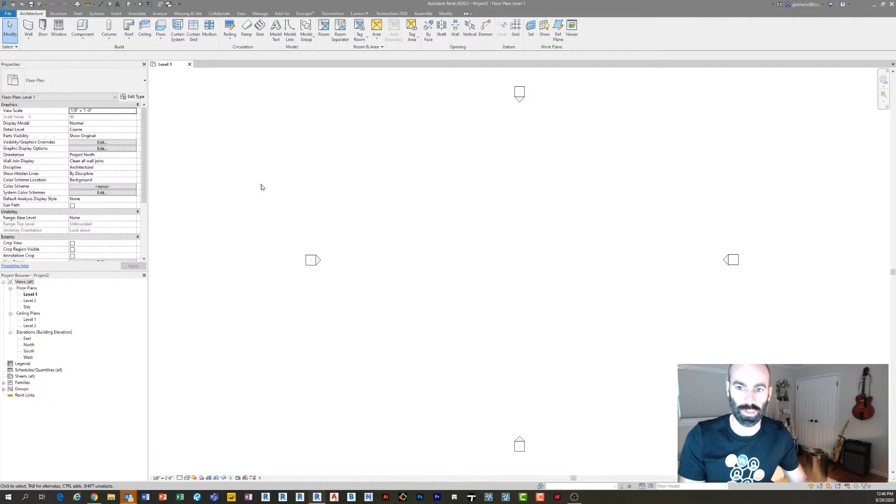My typical technique for modeling things like rain screens and anything that really has gaps in it, your best bet is to utilize curtain walls for that. And it seems goofy because if you're new to Revit, you hear the word curtain wall, you're thinking glass, tall buildings, etc. But really the curtain wall tool is just called the curtain wall tool, but it can be used for dozens and dozens of other things.

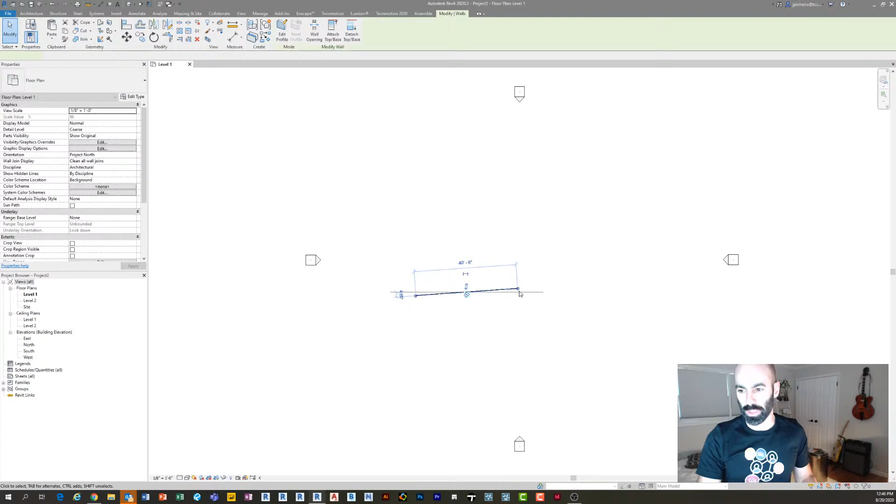So what I'm going to do in here is I just created a quick new project, and I'm going to use curtain wall 1 as my example. I'm just going to draw this curtain wall. The nice thing about curtain wall is that it can be used to make curtain walls like you're all thinking, right? But the value behind it is that it's a wall family that you can host grids and other walls inside.

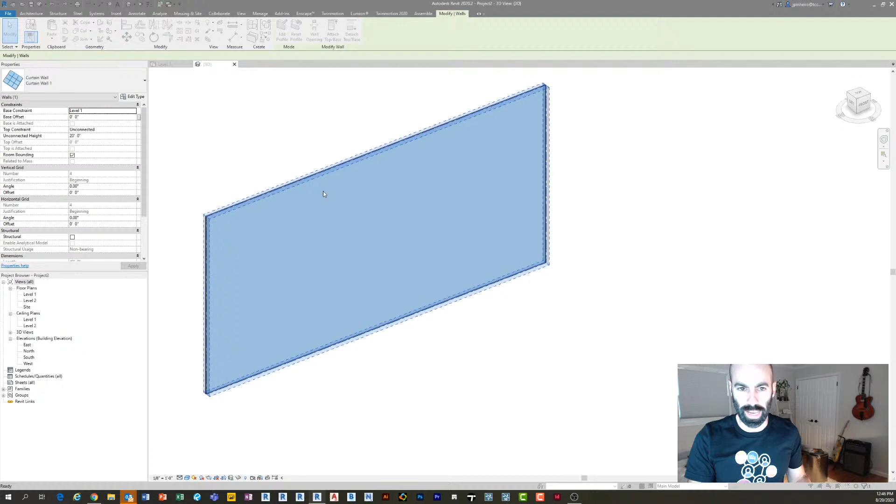And so a perfect example is, this is a wall, right? Instead of using glass, if I go to my edit types, I can actually make my curtain panel a wall type. This is not necessarily answering your question, but I do like to show some of the things that you can do with curtain walls. You could see my curtain wall is now an 8-inch CMU wall, right?

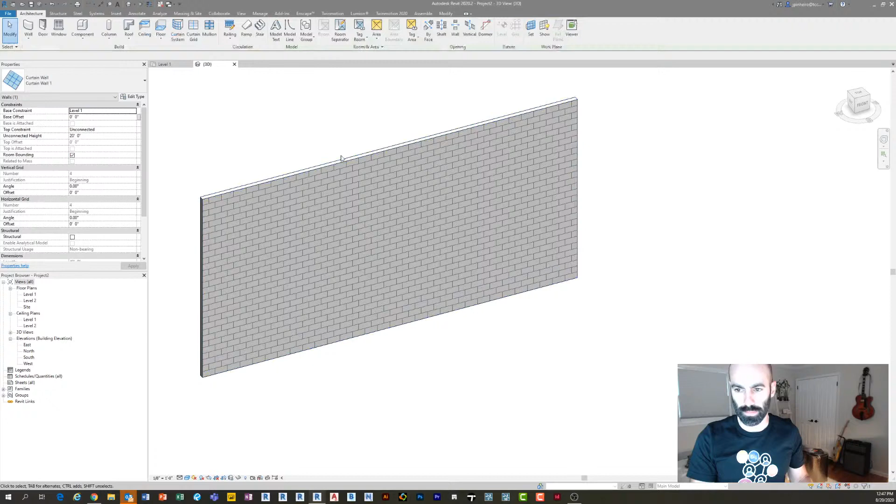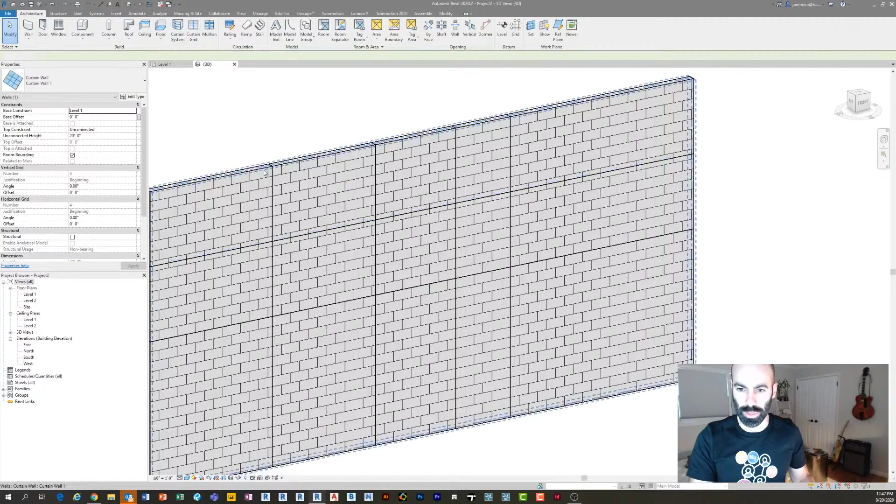But the benefit here is that I can add grids, and I can manipulate those grids. I can change the wall types within the grids. And I can also add mullions and manipulate mullions. So I can use the inside or the outside of the grid to do things. Now, CMU wall is probably not the best example. There's not much you're going to do here, other than if you really wanted to, you could put some mullions in there, so if you wanted to make a reveal or something like that, you can.

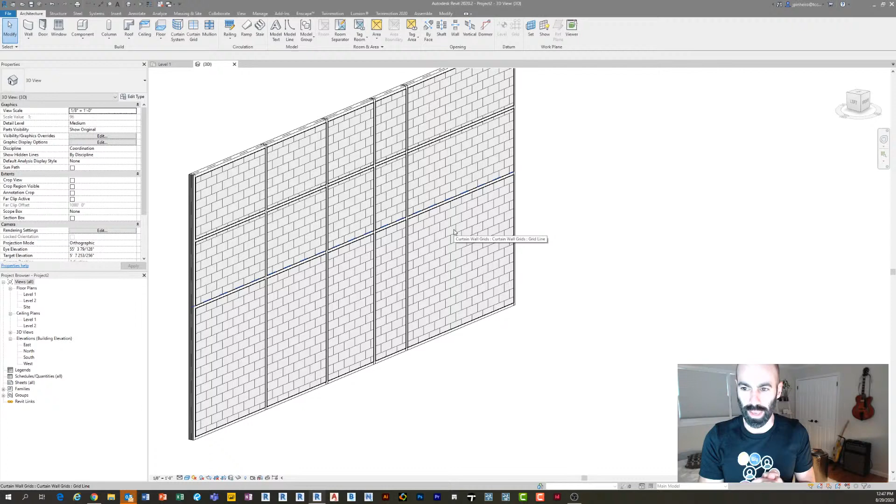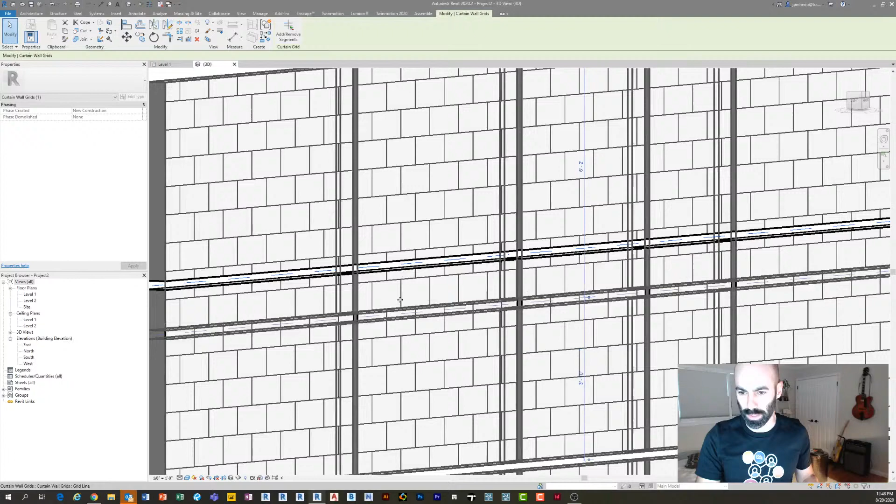And so, one thing you can do is you can filter out these curtain panels, or these curtain mullions, and use them. Or right now, for the sake of time, I'm just going to select them all and hide them just for fun. And so now you can see I made a CMU wall that has spaces in between it, but it's parametric, right? So I can go like this, I can go like that, I can move it around. Or I can make the spacing what it is.

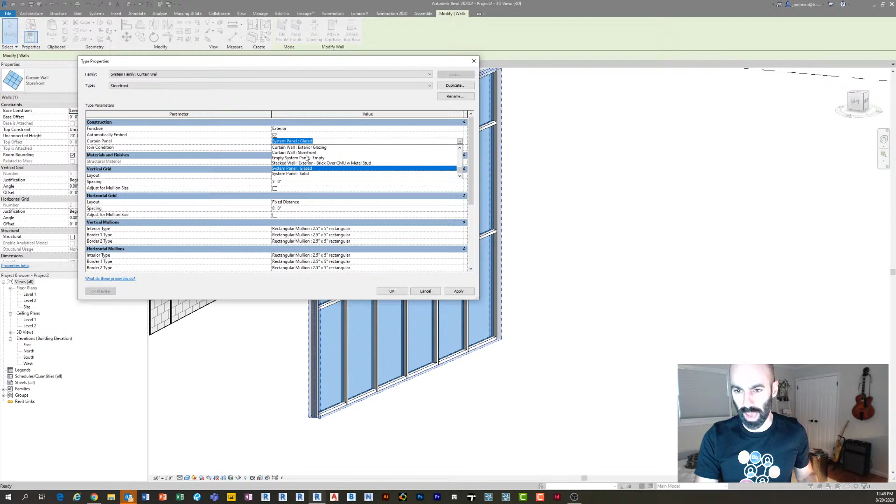But the other thing you can do with curtain walls is, if I was to draw this curtain wall, you also can use an empty system panel. So you don't need a wall within the panel part. So then you can use the opposite. You can use it as a gridded system of something, whether it's wood slats or what you're talking about, rain screens. So for example, if I go here and I say I want my system panel to be empty, there's one called empty system panel, and click apply.

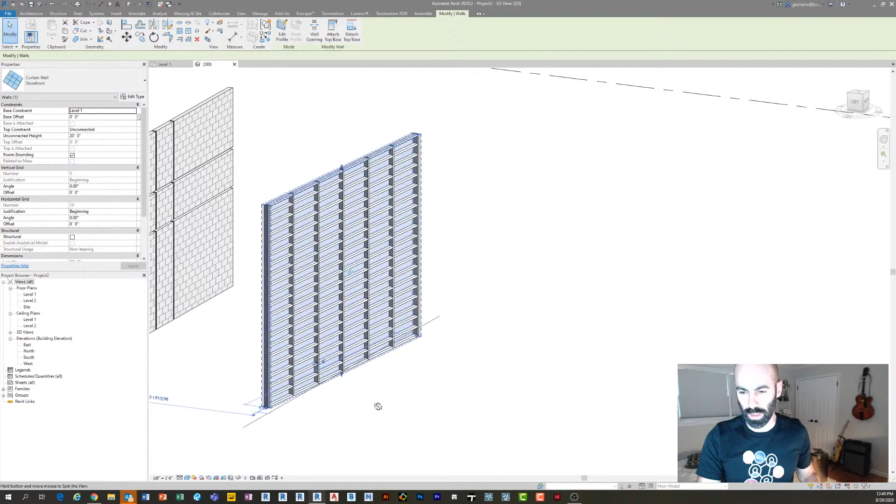Now I just have this open grid, and I can say I only want it to have a horizontal layout. So I'm going to get rid of my verticals, and I'm going to do a fixed distance of 1 foot for the horizontal. Click OK. Oh, I didn't get rid of my verticals. Try that again. Fixed distance, horizontal. Oh, that's all right.

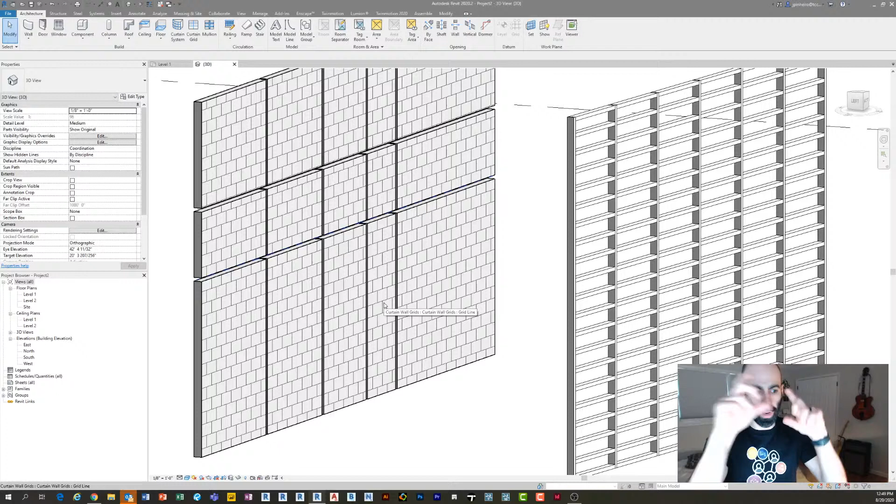So now what you can see is I'm starting to make, like this could be a rain screen, or this one could be the rain screen, right? So to me, that's how I would approach any of those gridded models that have to have some sort of reveals in between, pulled away, and there's different ways you can utilize the space in between. But yeah, and there are a ton of tutorials.

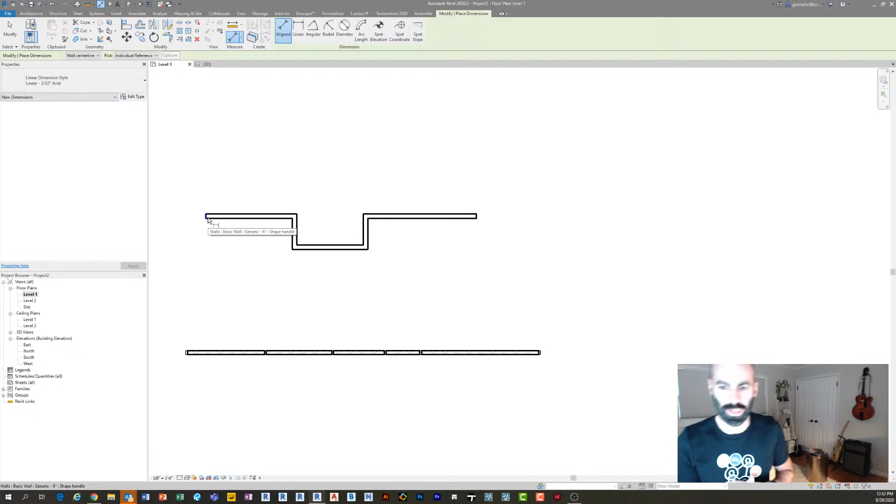So if I have a bunch of little things here, one of the really cool things about Revit, and those of you that are CAD users can probably relate to view scales and annotation scales. Revit is fully annotative, so it doesn't matter what scale your view is, everything's going to adjust to it, which is phenomenal. But it's also unit agnostic, basically. So if I press DI on my keyboard and just do a string of dimensions here, there's my string of dimensions.

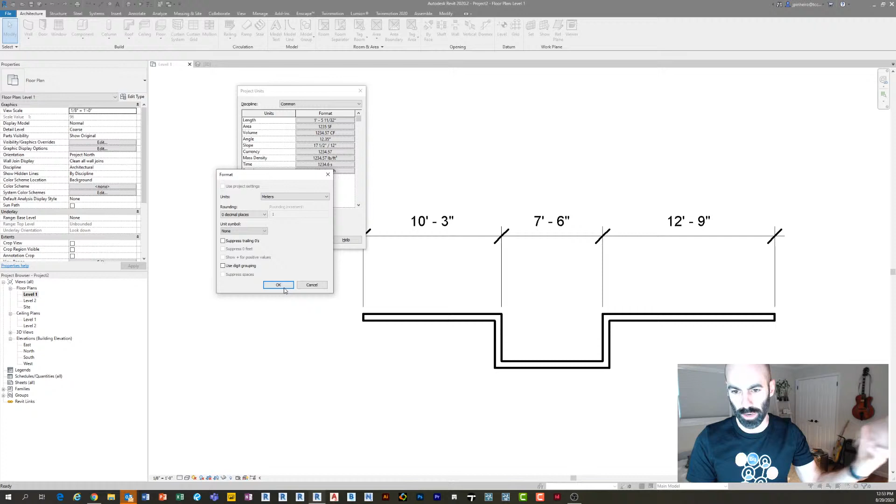There's a couple things I can do, right? This is obviously imperial. If I press UN on my keyboard and go to my project units, I can flip the entire global project units to meters, for example. Cool, fine. But let's say I want to show both in my dimension. I want to show feet, but I also want to show meters. Well, I can actually add those to my dimension types. You can work in both, which is really cool.

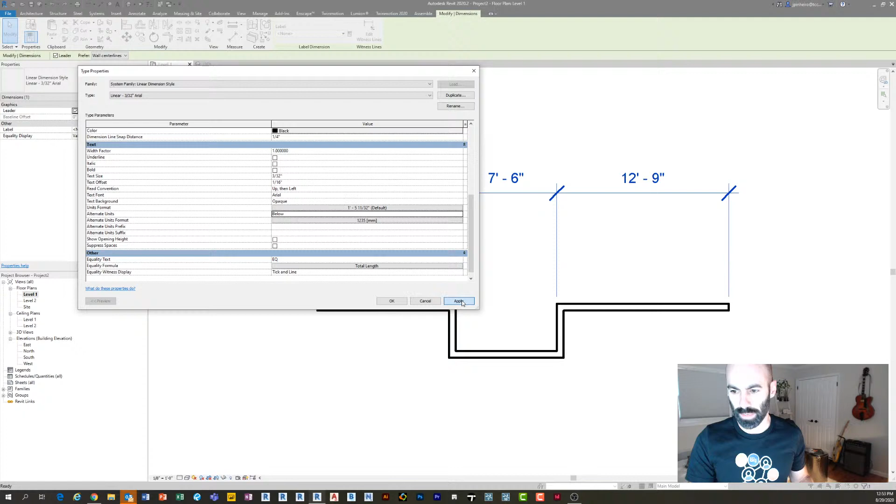So if I go to Edit Types, and I scroll down, you can see there's a little thing called alternate units, right? And I can say, yeah, I want to do alternate units, and I want to do it below, and it's in millimeters. I click OK, and look at that. Now I have millimeters here.

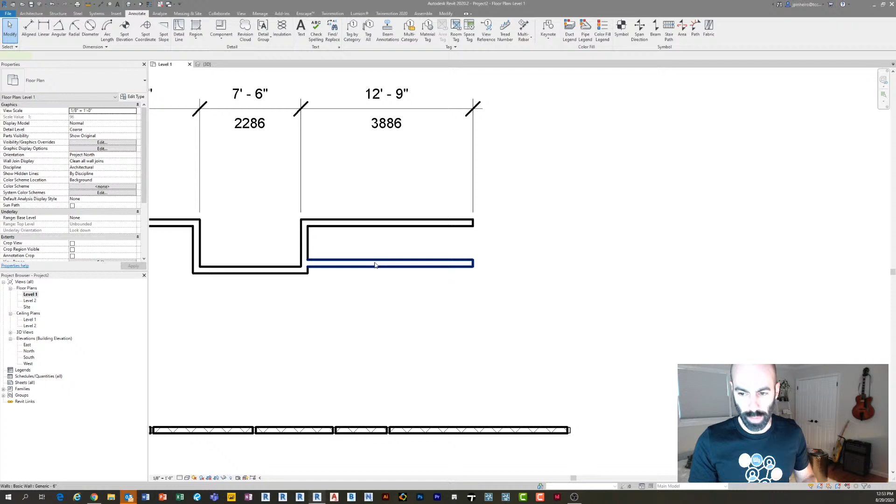The other thing that's really cool is if you're working in a project that is either or. So if I'm working in this project and I want to copy this wall 3 feet, I copy it, and I can type in 3 feet and press Enter, right? But if I'm working on the same project and I don't know what a foot is, because it's some stupid 16th imperial thing that Americans use, and I want to use millimeters, I can actually type 10 or 100 mm.

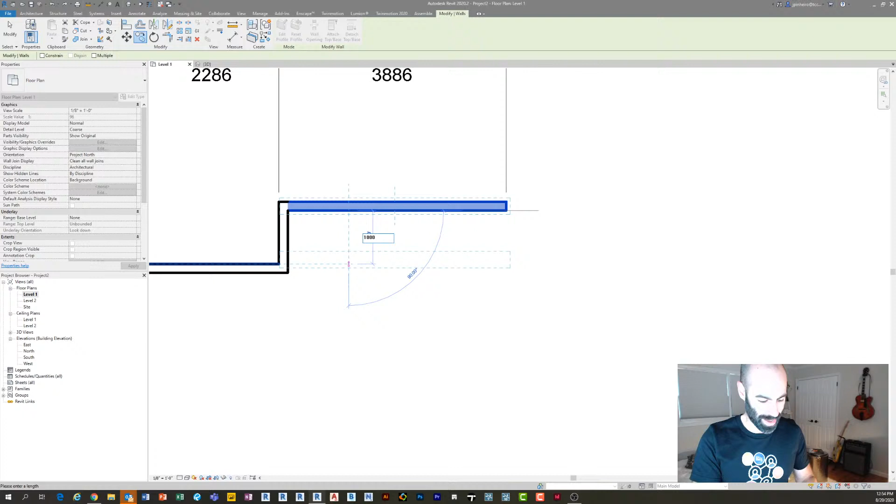And you can see it overlapped. I should probably do 1,000 because I'm a stupid American who doesn't know metric. 1,000 mm, and press Enter. You can actually type in dimensions in any unit format you want, which is super cool. So I don't know if that answered your question, Saeed. So if it did, let me know. But that was just something that came into mind.

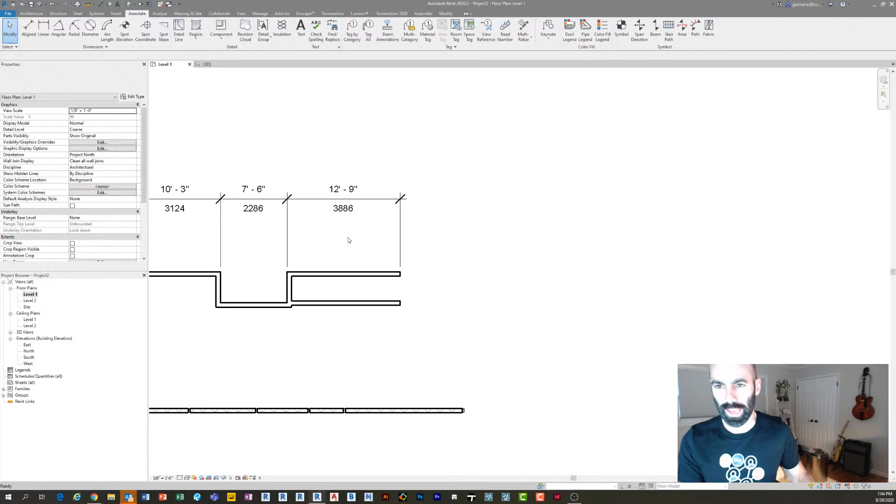Thanks, you guys. How do you sketch a circular stair? How do you sketch a circular stair, huh? Well, I'm assuming you mean a spiral stair that continues, and it's tough. It's not, I shouldn't say it's tough. It's just you're gonna need... And there's a few really good blog posts out there about sketching a circular stair, and you know, the unfortunate piece is what happens with stairs.

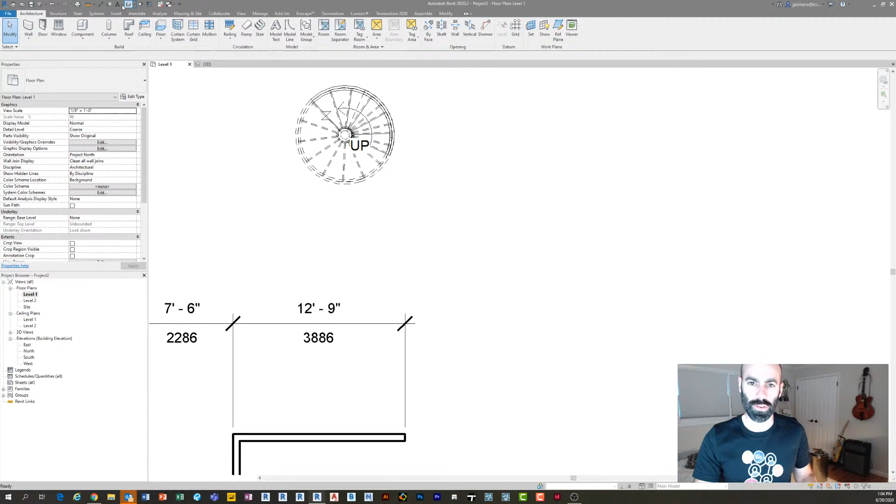If I go over to stairs, right? So you can use the circular tool, but you can only get it to close itself. Right, so I just made a circular tool and it closed itself. So if you need to continue past closing itself, or continue up, as you can see, this thing loops around here. You have to use the circle tool, if that makes sense. So what I did there is I went to stairs, and there's one here for full step spiral.

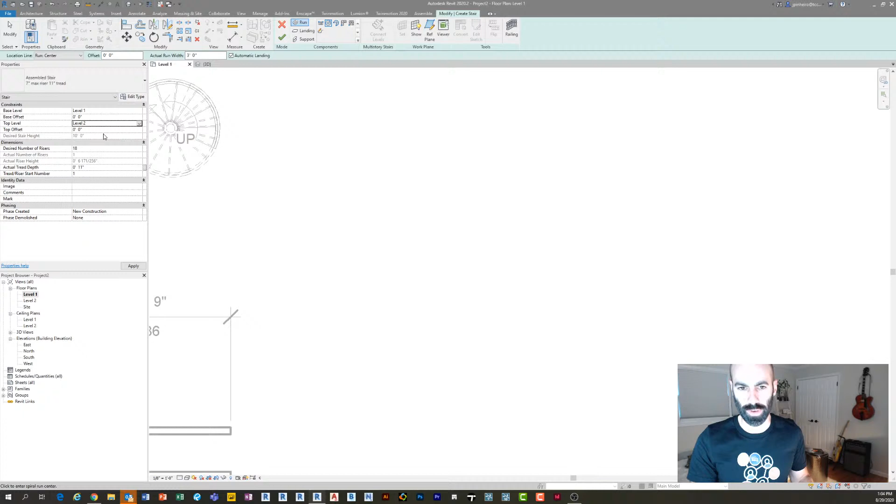And I'm setting level 1, level 2, and it's going to continue the circle based on the level. So if I want to offset to 30 feet above the level, it's going to make the stair based on the radius you want to get to that level. So they've made it a little easier, but well, this one's going to be interesting looking. But you have to use this circle. There we go. You have to use this circle when you're sketching the stair.

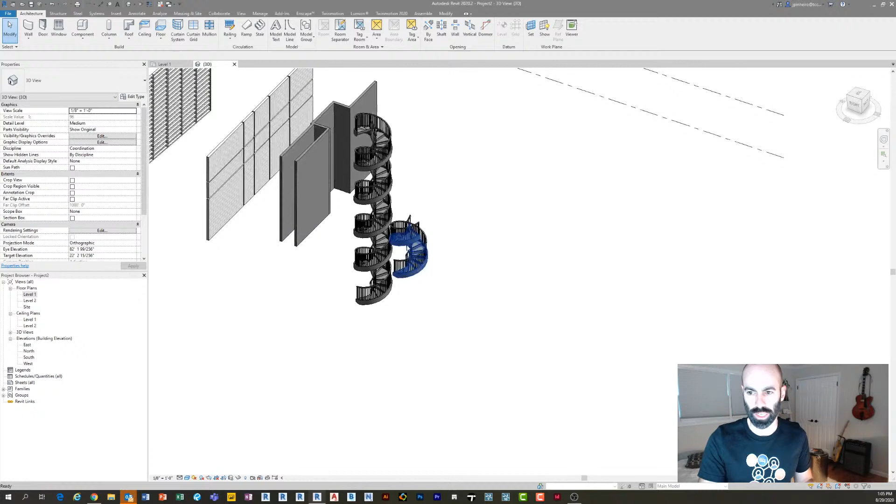Okay, so if I went a little quick, right here in the components, when you're drawing, you could do an arc, you could do a straight, and then you could also do a circle. So there's your spiral stairs. Sweet.

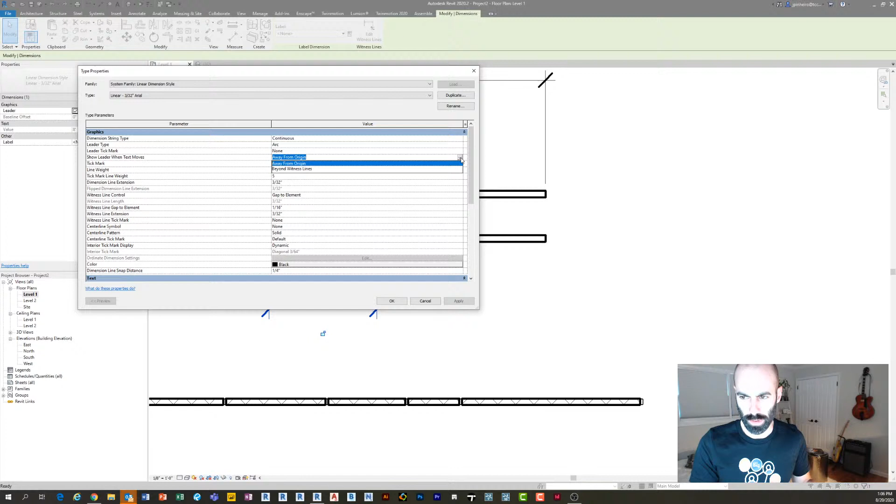Looks like somebody was following up for Saeed about making dimensions show between the dimension lines. So let's go back. Actually, this is going to be fun. Let's see. So I'm going to get rid of the alternate dimensions on this guy. Where'd it go? Alternate off. Okay, now. Dimension style, string.

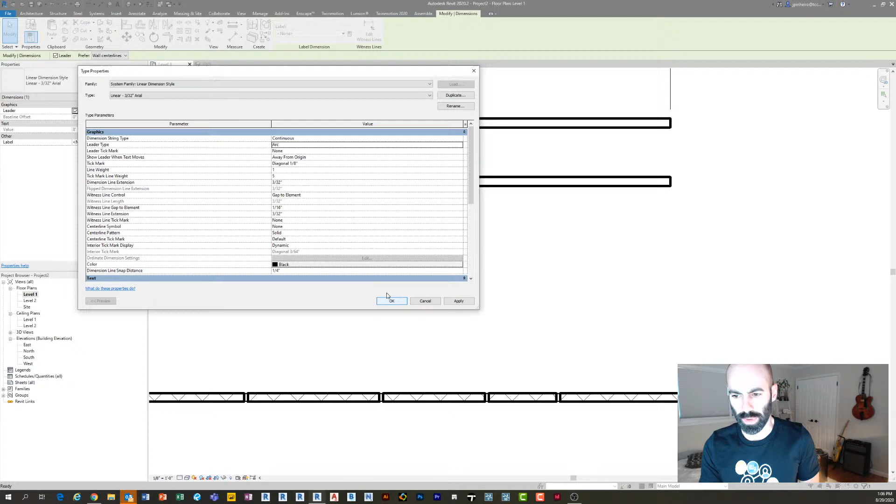So I think what you're asking is, is there a way to show them like that? I think. And I actually don't know. I've never actually tried to do that. I know you can turn the leader off if you wanted to. So for example, in here you can check off the leader, and then you can put it wherever you want. But by default, I don't actually know if you can. If someone else out there does, let me know. I've never tried to do that.

One thing that I will say when we're talking about these things is, one of my biggest pet peeves is people trying to fit old CAD standards into BIM software, right? Because that is such a non-important thing. I mean, really, and no offense to Saeed, this is just a soapbox kind of thing, the fact that your dimension text is above or in the middle of a dimension line is just so insignificant in the grand scheme of what you are doing using BIM software or in general, right?

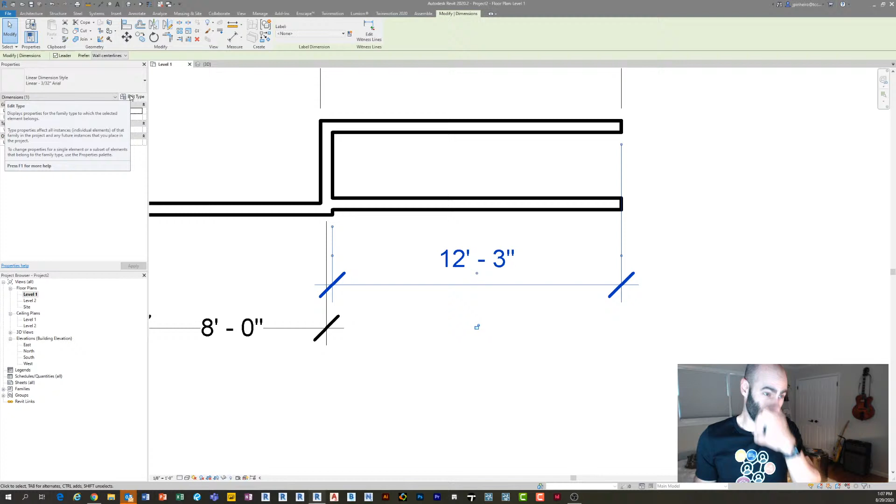So to me, it was like back when you couldn't put filled dots in schedules. I remember at the firm I worked for, the guys were having conniptions because they couldn't put their dots in their door schedule. Where, yeah, you can use a Y or an X or something like that, and those are things that are so insignificant compared to the other benefits you are gaining from using BIM, right?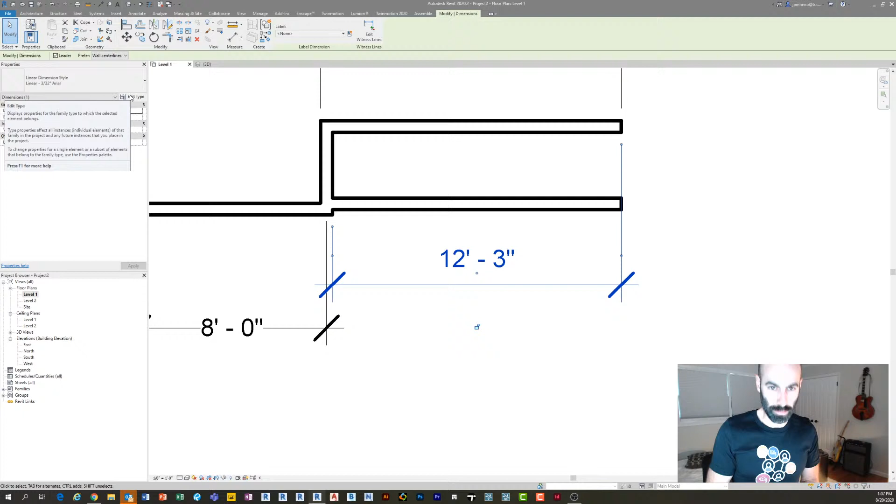Not to say that you can't do it. I'm assuming you might be able to. I just can't remember if there's any way. Text offset, maybe put it to 0. Let's see. No, it's just 0 down there. So if anyone thinks about it, let me know. But yeah.

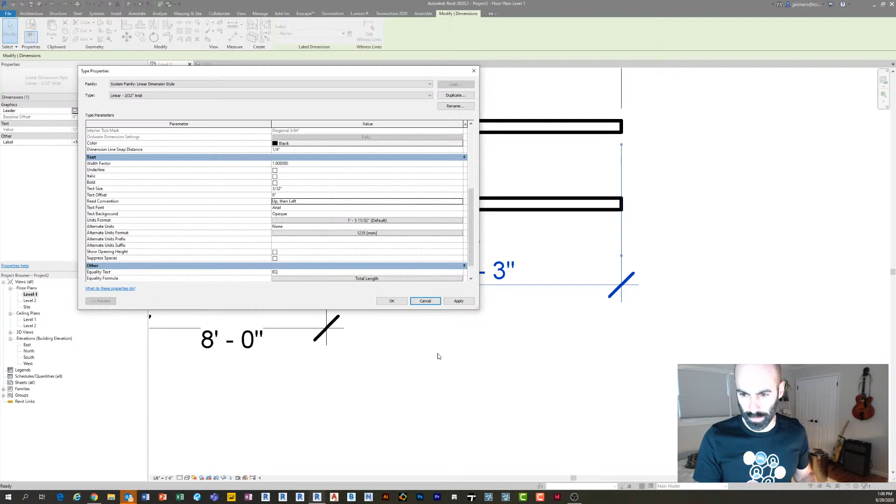So I don't know off the top of my head if you can do that by default. But I will say that I think it's such a non-important thing, right? We should be striving to use the 3D models more than striving to get the 3D models to look like the documents from the 2D program AutoCAD. That's just kind of my thoughts on it.

Didn't mean to go on too much of a rant there, but hey, you guys are watching, so let's do it. Circular stair, I already answered that one.

Ed asked about how do you filter model groups and filter them by some shared instance parameter. We can get into that next week, but since you asked it, I do believe there are different ways to filter model groups. So this is group 1. Model groups themselves have, I'm pretty sure you can make a parameter that lets you do it. If not, I think you can just use group name.

So let me just double check. Woo. All my windows are popping up on the left, so I apologize as I drag everything. I was clearly working on Revit on the other monitor before all this.

The groups aren't in there. So I do believe there is a way. I just have to remember. That may be something that we can pick up with Aaron next week, since we'll be talking on the subject of filters. I just wanted to see if there's any way to do a model groups. Oh, there's model groups. I think I rolled right past it.

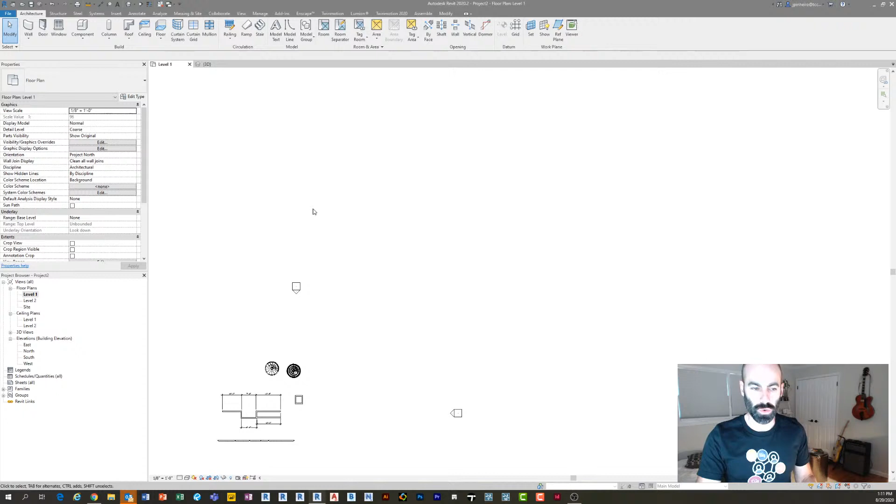So ML Sweeney just asked about parking garages and how cut planes and slopes are kind of messing with you, and honestly, that's a really difficult thing to handle. Your best bet is to work with plan regions. For those of you that aren't familiar, a plan region lets you modify the cut distance of a specific area of a plan.

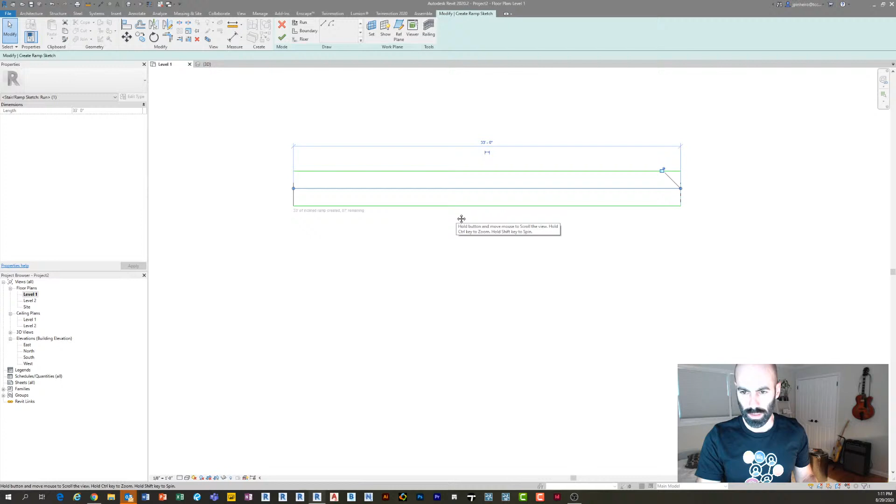So since you asked about parking garages, I'll draw 2 ramps here. I know this is not a parking garage ramp, but it's a ramp. And we'll draw it so that it's really long, 87 feet. It's a long ramp. Okay. Actually, because it's a parking garage, you're probably using sloped floors, so let's do that instead.

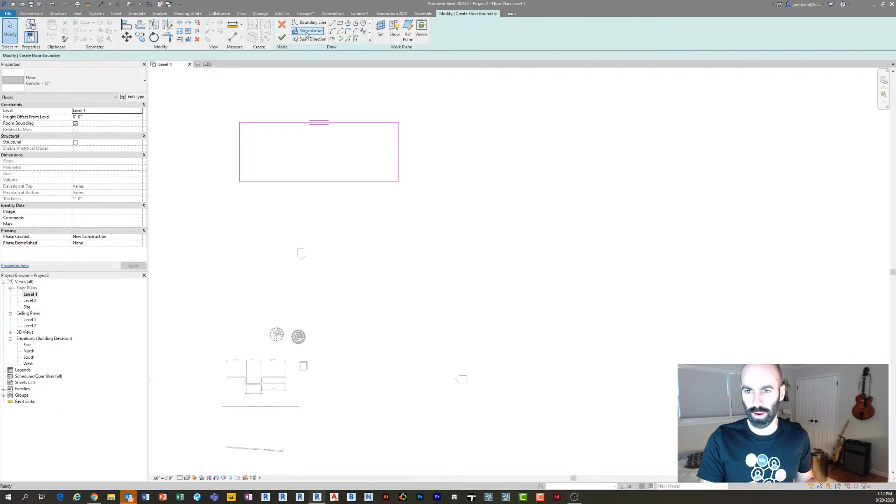So we're going to do a floor here. I'm going to draw a slope arrow, and make this thing slope 10 feet at the foot of it. And then I'm going to mirror this, or I'm going to modify the slope and go the other way. This is going to go up 10 feet, and this is going to be 0.

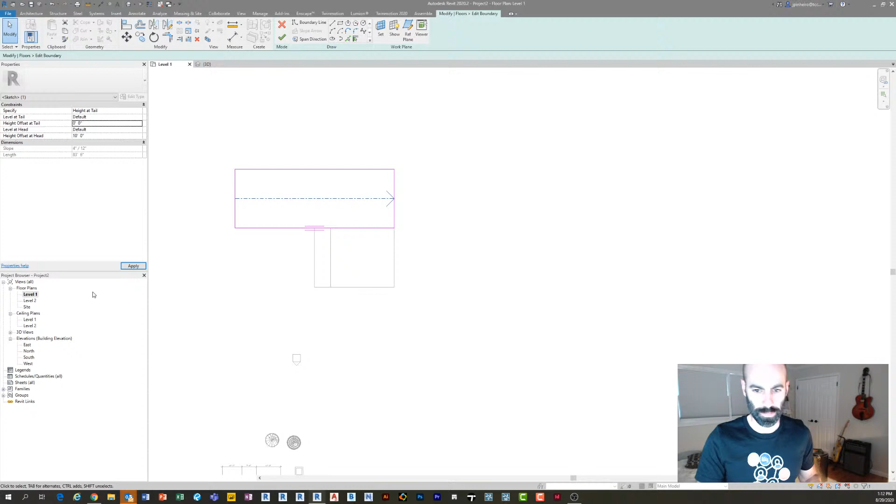Okay, so in 3D, what I just made is these two slope ramps. And so I think the question is, how can you control these to view correctly? It's going to be really difficult depending on how your cut plane is. But what you could do is use what's called the plan region.

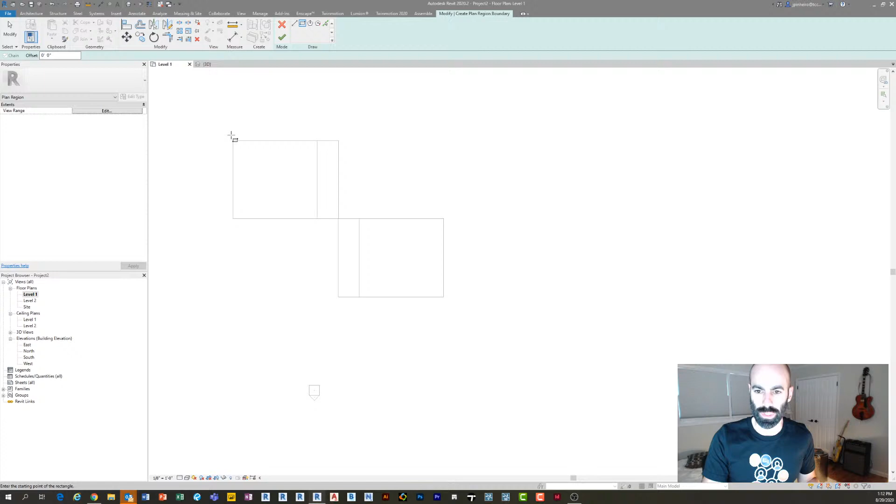So if I go to View, Plan Views, Plan Region, it's a couple clicks in there. The Plan Region is kind of like a scope box where you just draw the border of it, but it allows you to change the view range of just this piece of your plan. If I click this now, the option that I have is called view range. If I click View Range, I can change the cut plane of this view. So I want this to go up to 10 feet, and click Apply.

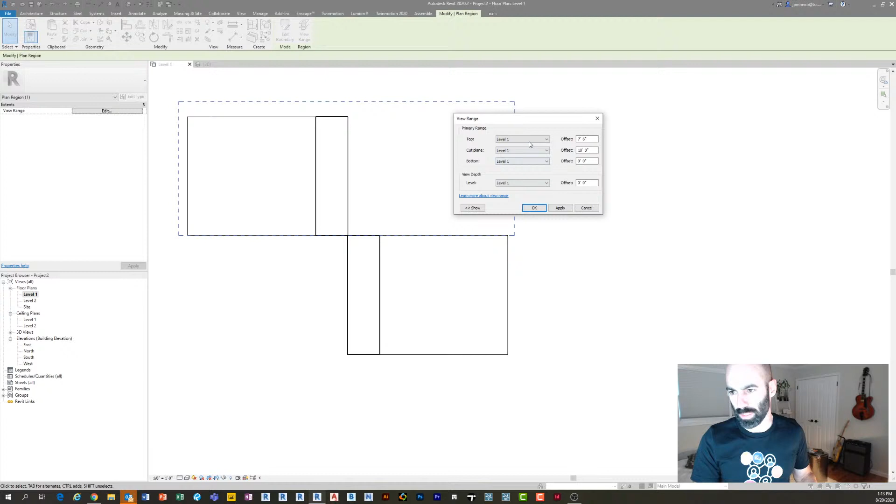That's above the top, of course. You can see now, just within this region, I'm actually cutting at 10 feet instead of 3'6". And so that may be enough to get you to what you need. And the nice thing about plan regions is that you can...

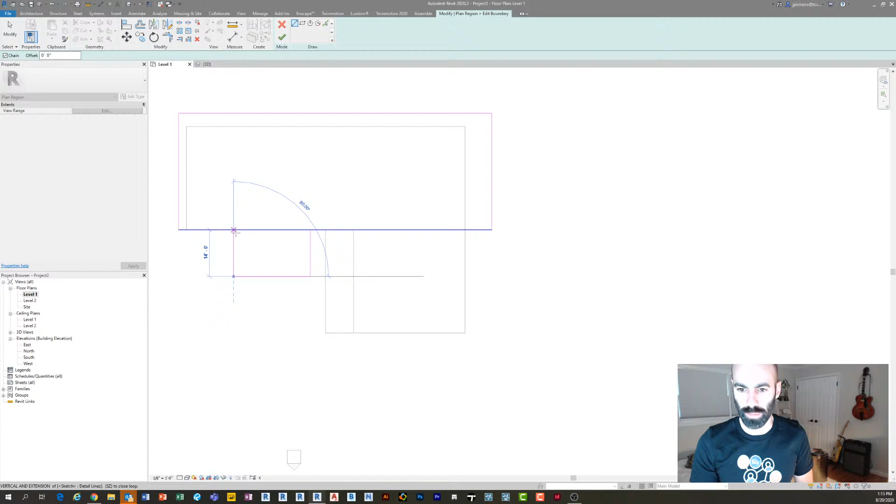I apologize if you guys hear that. Looks like they're finally taking a tree out that fell down last week.

I hear chainsaws. You can actually modify the shape of these. So that may be your best bet for parking garages.

Oh man, we're flying. It's already 1:15. You guys are nuts. This is awesome. All right, what do we got here?

Lowercase in one, uppercase in the other, company standard thing. Well, there you go again. I still don't understand why you would ever want to see that.

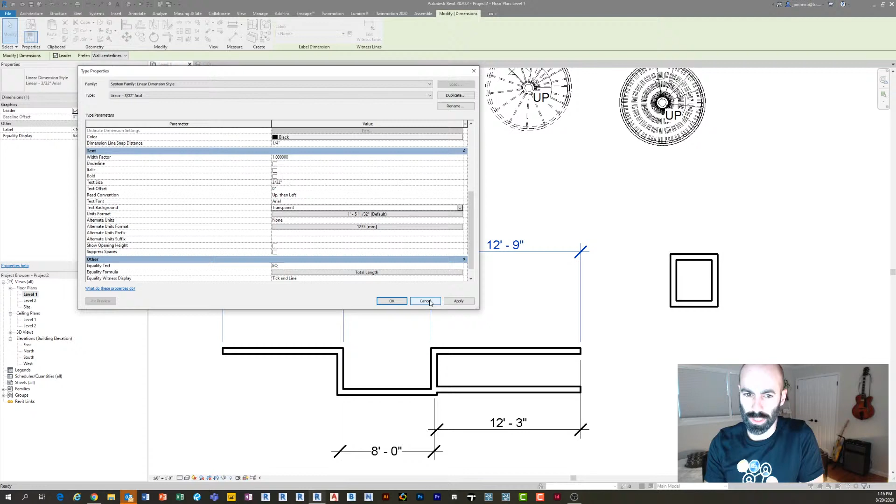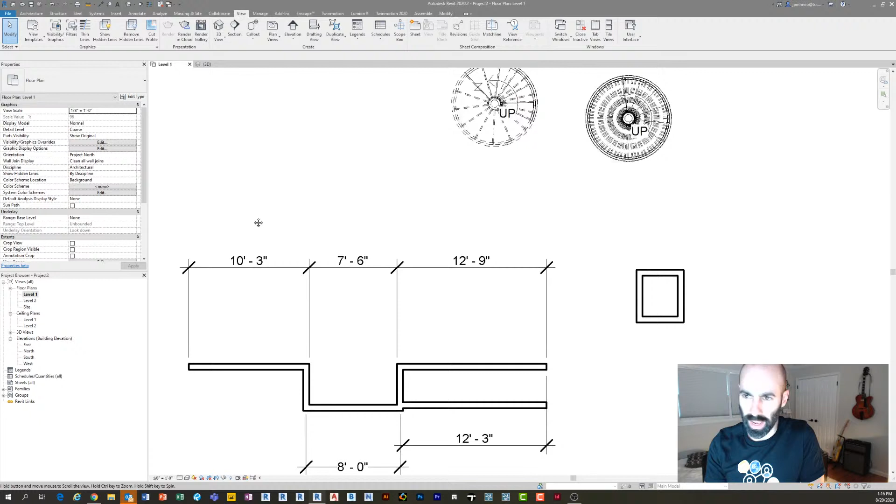The only other thing I can think of is if it's during printing. I've seen that happen where there's an issue with your graphics and the way it's printing. Let's see. I don't know if that answered your question, Justice, but I'm not really sure why that would happen. I have the most up-to-date, I think I'm on 2020.2, and my text seems to be working fine.

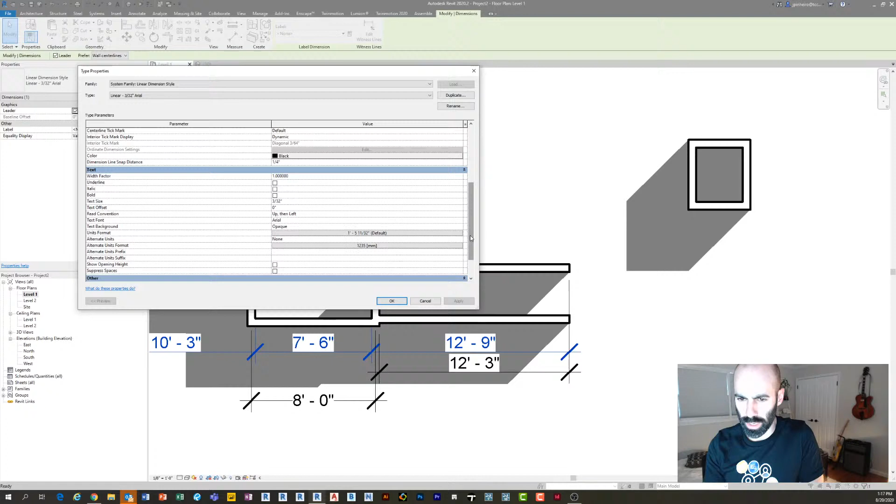If I was to turn shadows on or something, let's see. Let me turn shadows on. So there's my opaque text there. If I flip it to transparent, it should be transparent. Yeah.

All right, let's see. Man, Revit must look like AutoCAD. Gary, thanks.

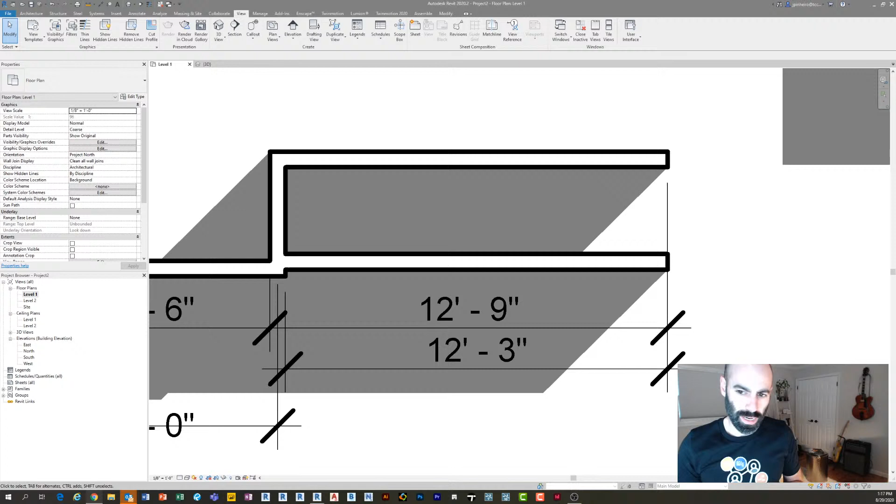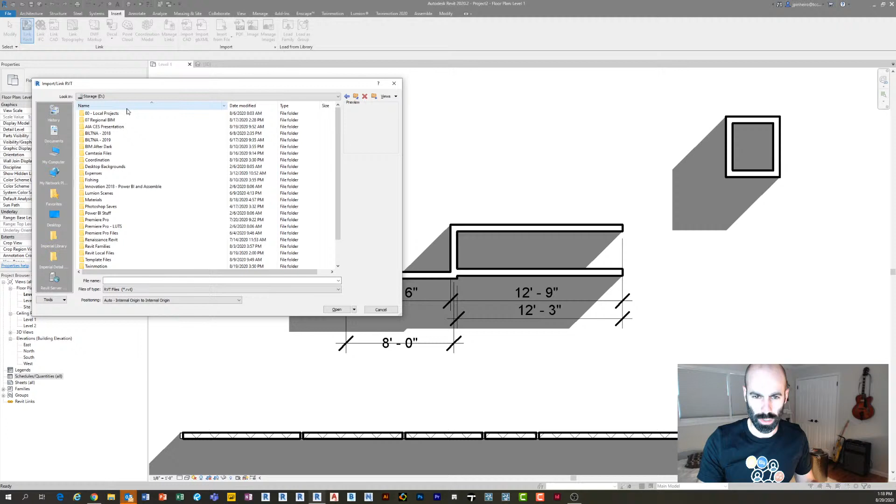So Jeffrey asked about links coming in and scheduling them for quantities. When you do have a link in your file, you do have the ability to schedule information from it. You have to check a little box. So if I really wanted to real quick, I'll link in a file, just a random file. Let's see here. Storage. So if I link in this file and I create a schedule, so there's a file there. Ooh, that looks good. I'm gonna make a new schedule and I'm gonna do a door schedule.

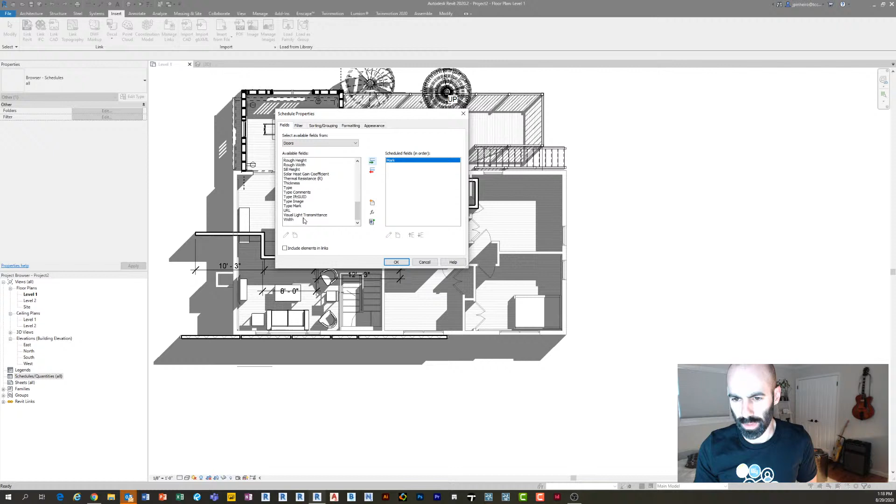I'm going to add the, I don't remember if I used mark or type mark, but let's just do type mark and mark. And then we'll do family name or something like that. Right here, there's a little box. See, it says include elements in links. So if you check that box and click OK, it's actually going to pull in the information. So notice there's all these doors here.

All my doors are only in the linked file right now. So you can pull elements from a link. As far as formulas, I'm pretty sure formulas work the same way, but I don't really have a formula right off the top of my head that I could use, but hopefully that helps, Jeff.

Scour just mentioned that you can put a dot in a schedule. Yes, Revit Pure. Nico over at Revit Pure put that tutorial together, how to add that solid dot in there. Let's see. Thank you for asking my question.

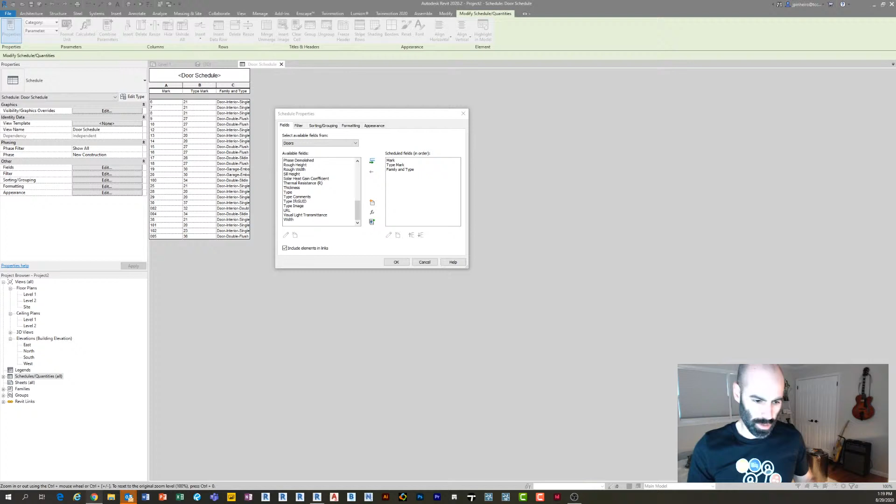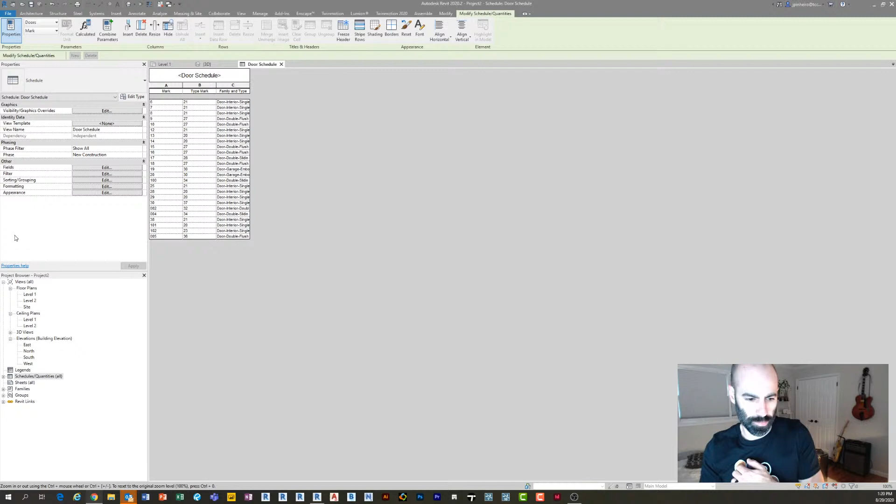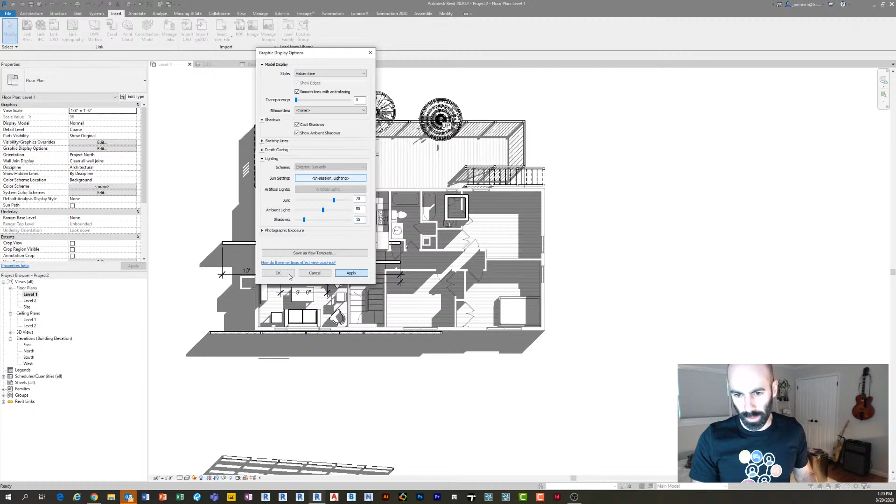Actually, this is an interesting question. So TTYL just asked, when he puts a column in on floor plan. Sorry, I'm just gonna reduce the shadows a little bit. I'm also gonna turn off this link. He wants the hatch to be the entire column and not pieces of the column or something of that nature. So I'll just talk a little bit about that because I think it's an interesting topic.

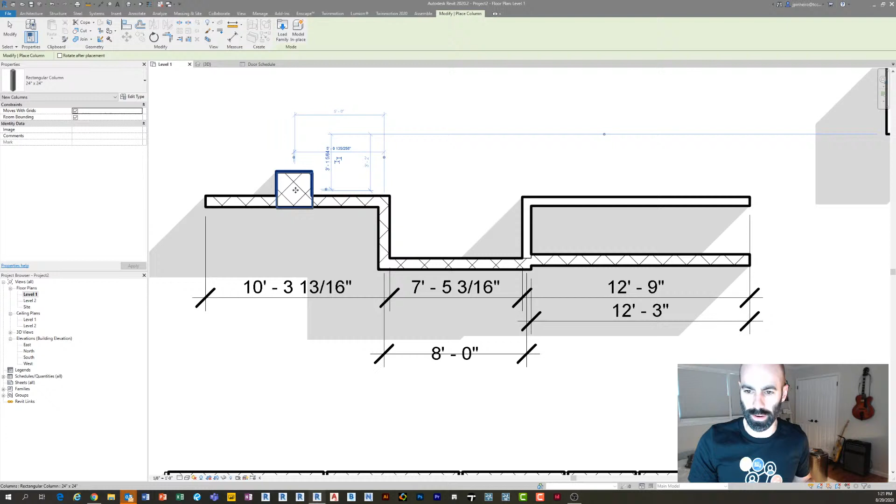So right now, if I have CMU walls and I go to architecture column and I put in a rectangular column, you'll notice the column is actually taking the whole wall for the material and the way it looks. If you go into that column, remember this is an architectural column, this is not a structural column. So if I was to go in and do a structural column, of course, I don't have one that will take the material, so let me go to structural columns. Let me go to concrete,

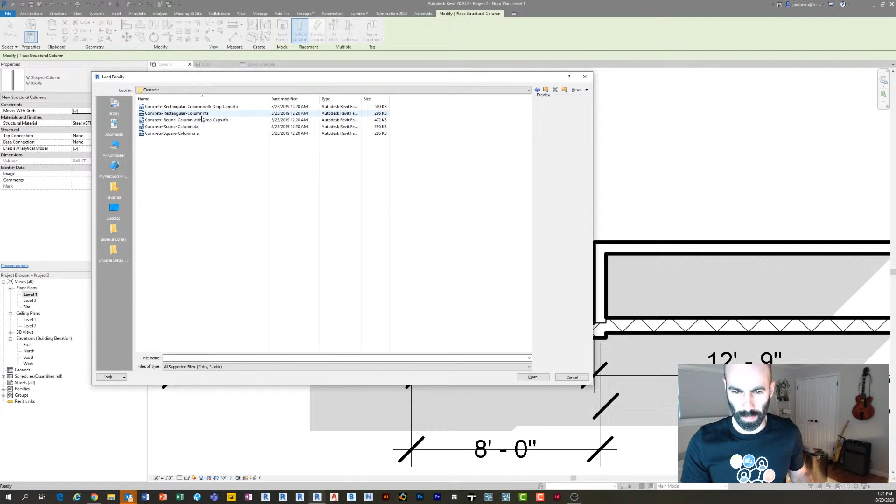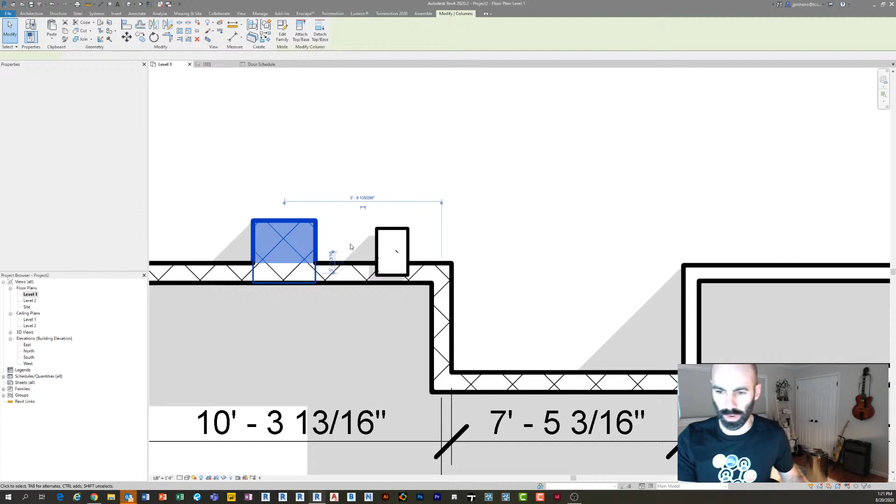rectangular, whatever. Okay, I place it in, and it goes below my walls because that's just how it is. So let's do up to level 2. You notice that one stays concrete, right? Meanwhile, the architecture one blended in with it. And that's kind of the way architecture columns versus structural columns work. And what you can do is, I believe, assign a material to this architectural column. There was my materials box way over there. Oh, I'm in coarse.

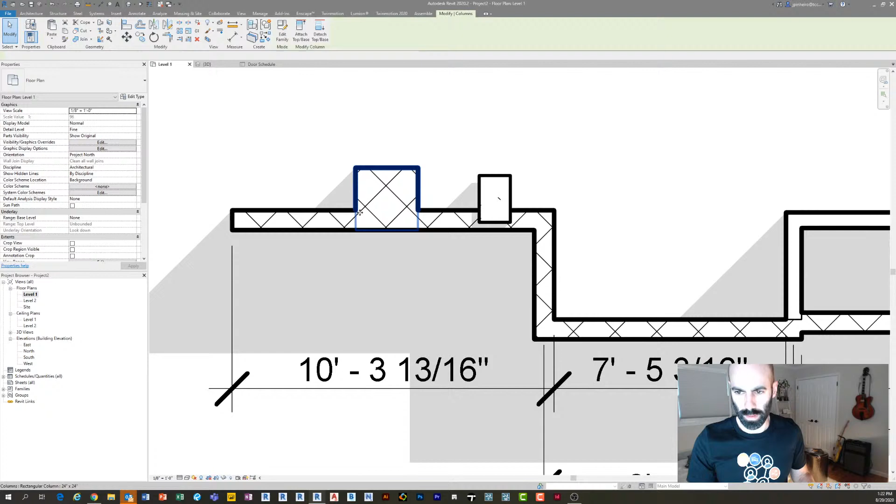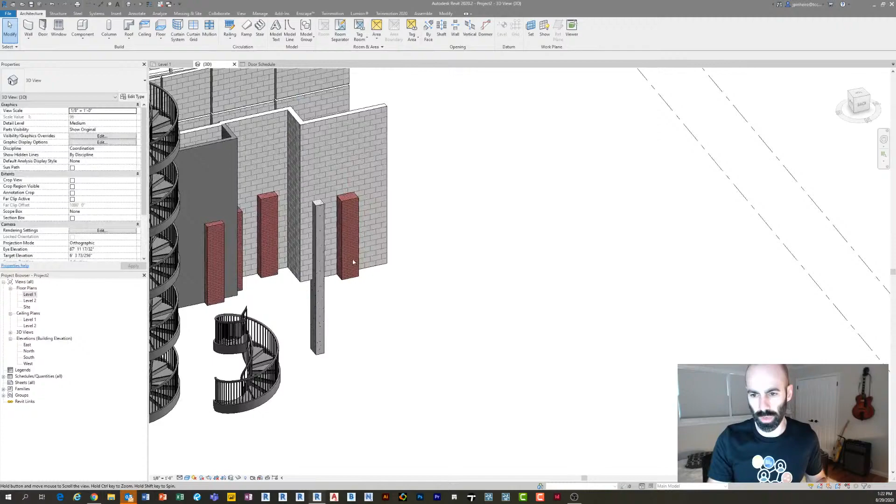So I think what you're talking about is how the architecture column inherits the wall that it's attached to, and that's because you're using the architecture column. If you want control over that, then you have to use a different column type. And so what you see there is it's actually taking on the characteristics of it, which is kind of goofy too, because you'll notice the actual material I changed to brick, but the cut material is not. So that's a category thing, as far as I know. I don't know if that answers your question, but hopefully it explains what's happening a little bit.

All right, so it's 1:22. I'm going to continue reading through this, but I think right now we should probably just cut the questions or save them, because I don't think I'm going to get through all of them, and then use them all tonight. But I do see a few more questions, so I want to try and run through these a little bit. Let's see here. I use floor as a ramp. Yep, awesome.

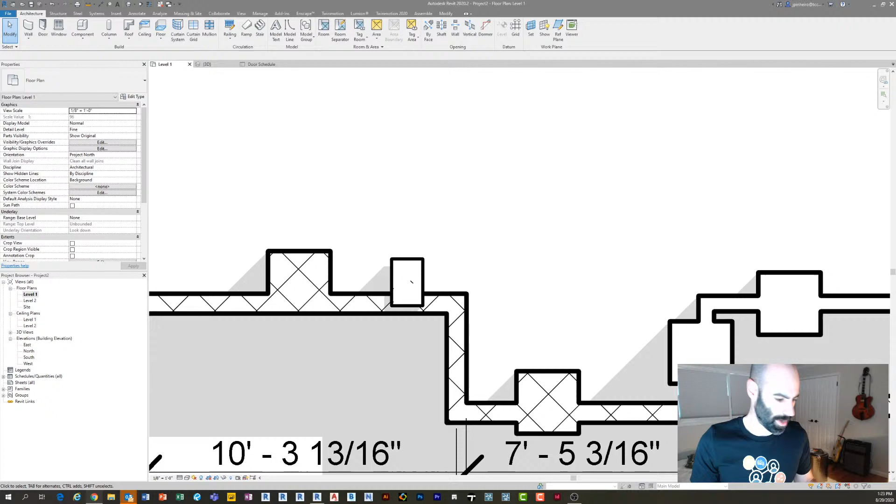So Ruben said he's been trying to find a way to get inline text dimensions for years and hasn't found a solution. I don't see the point. You're saying that it would save some space when you're drawing, but really, you can make room for dimensions, guys. Come on. And if you really want to, you can just move them for that one little view in detail. I don't think it's an important piece. And from what I can tell, you can't physically set it up that way. You can move them though, and just turn off the leaders, and you're good to go. You guys are discussing ramps versus floors, so enjoy that discussion.

Let's see. A couple people. Chris is responding to CAD standard versus use the model, but the reality is we still need to produce the same documents from CAD. No, I don't agree with that. No one out there is saying that you need to produce documents to look like CAD. Right now the contracts are saying you need to produce documents, right?

So no, dimensions. Showing a dimension inline or outside of a line has nothing to do with the contract, right? So no, I don't fully agree with that, and I don't fully agree with forcing things to look like the way they did in CAD. No, not buying it.

Oh, Tim just mentioned the concrete column that I was talking about. Good point. I just had a brain fart. Thank you, Tim, very much. Let me show you guys how that happens. If I go over to screen and camera.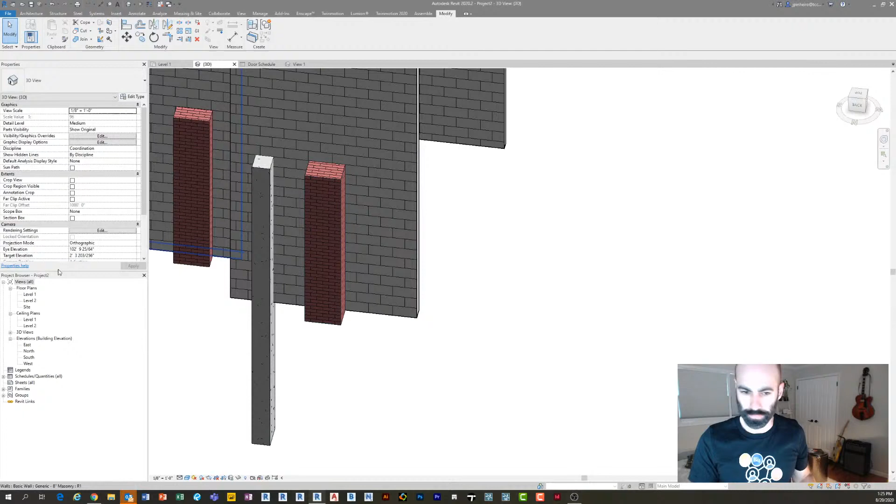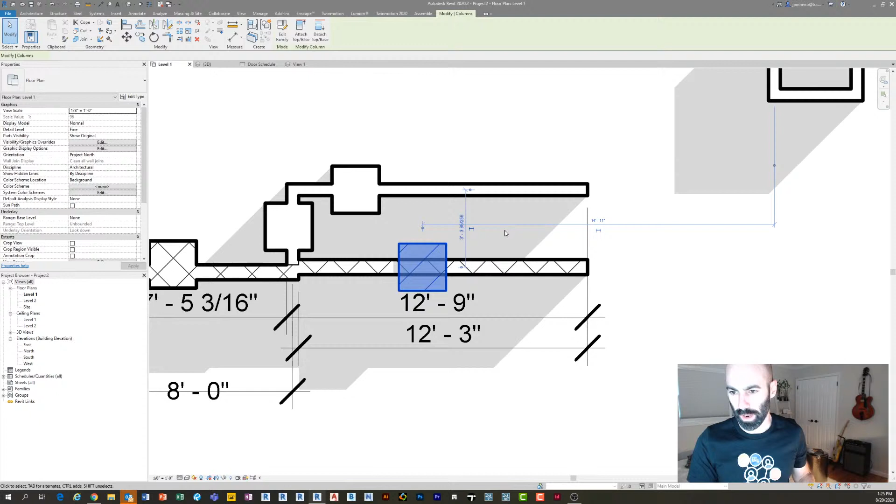So the reason why this column family is doing this is, if you go into the family type, over here under properties, there's a checkbox that says automatically joins geometry to walls. If you uncheck that and load it in, it won't do that crazy automatically join thing. It shouldn't, at least, depending on the type. There we go. Now you can see it's not automatically doing it. I don't think every family category has that option, but great point there. Go to Edit Family and turn off automatically join to wall by type.

So Chris just gave me an example of why he would use lowercase and uppercase. Chris, I'm still not 100% sure what you're saying. Revit text is annotative. So if you shrink the view, the room name is going to shrink. It's always going to be the same size. So uppercase versus lowercase versus size is a whole other thing.

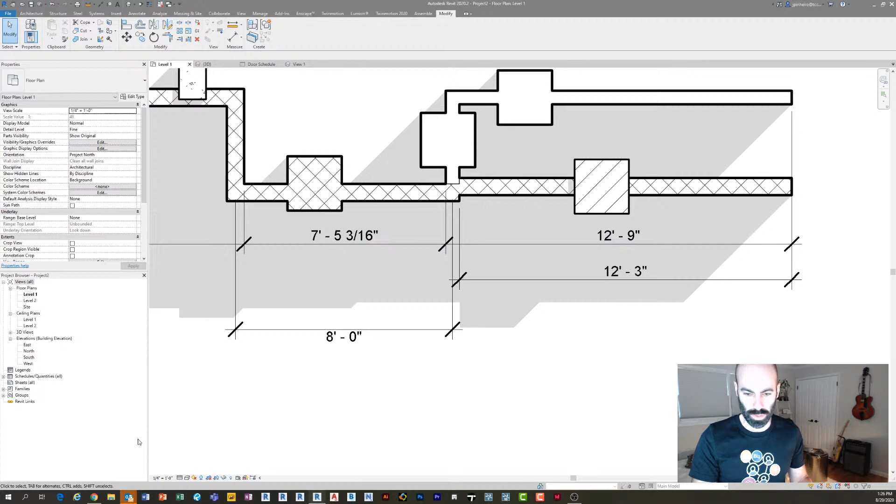As I mentioned before, one of the nice things about Revit is that you don't need to have the CAD way of having a 48 or 96 or all these different size text. That doesn't need to happen in Revit, right? Right now this view is 1/8 inch. If I go down to 1/4 inch, look, my text shrinks automatically. If I go down to 1 inch, it shrinks automatically. You don't need to have a room tag for the scale. So hopefully that's a little helpful too.

Can you do a session on BIM for interiors? Sure. I would love to. I think of a couple people that may have some things to say on that. I can speak my mind on rendering interiors and the architecture side of it, but if anyone out there is extremely experienced and has a lot to show in interior design for Revit, shoot me an email.

I'd love to set it up because I do find that to be a fascinating piece of it, and I've been involved in plenty of projects trying to help set those things up. My most experience with it is setting up some standards and working with interior designers. But man, I'd be happy to have anyone on who wants to talk about interior design, because I do think that's an extremely unique piece of using Revit.